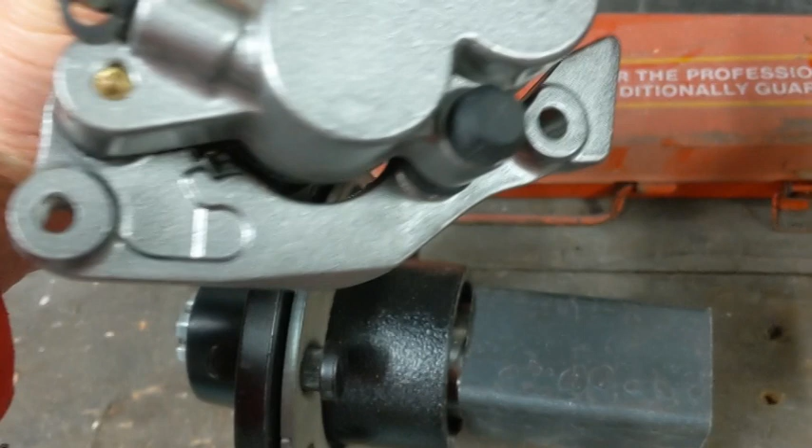So the space is actually going to be determined by, in actual fact, the bracket, the mounting bracket for the brake caliper. I can space the disc for the caliper over there. So it's those two mounting holes, one there and one there, attached to a metal plate, which then is welded onto that stub axle. So my new spacer will be there, rather than based on just the front end of it clearing the wheel.

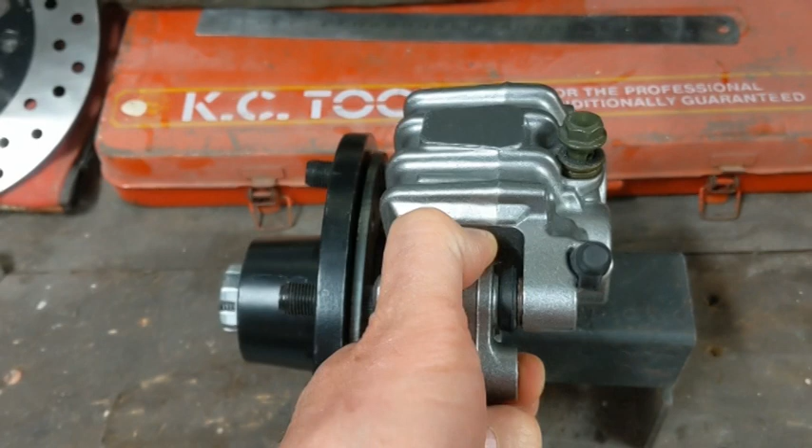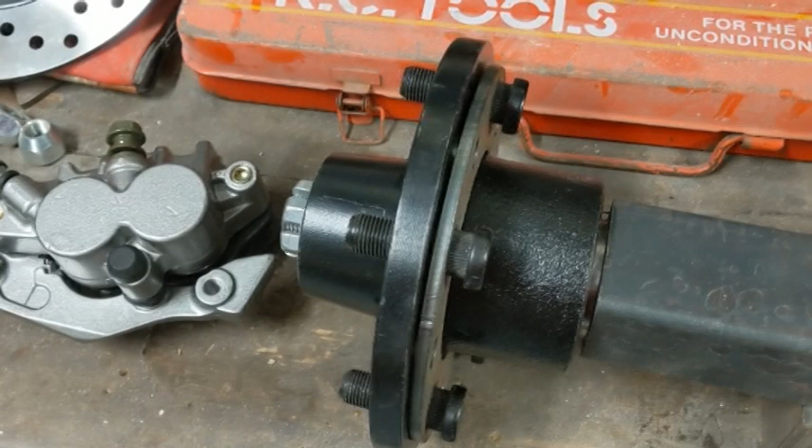So looking at the big picture is what we needed to do here. I'll make some adjustments now. So the next thing I'm going to need to do is to design a bracket that mounts, takes two 8mm bolts here, that then welds onto this plate, and it needs to be appropriately positioned so that the disc and everything sits nicely.

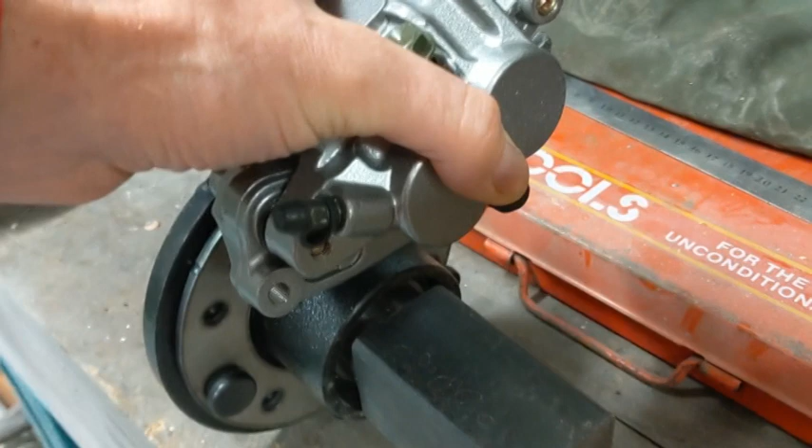So it'll sit somewhere, obviously, like, I don't know, doesn't really matter what angle I put it on, I don't suppose. I might just put it at the top, I guess, when I make the mounting bracket. So we'll go and design a mounting bracket.

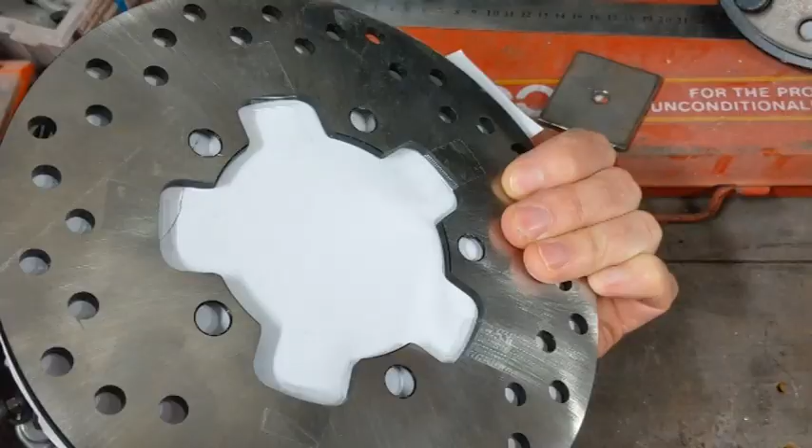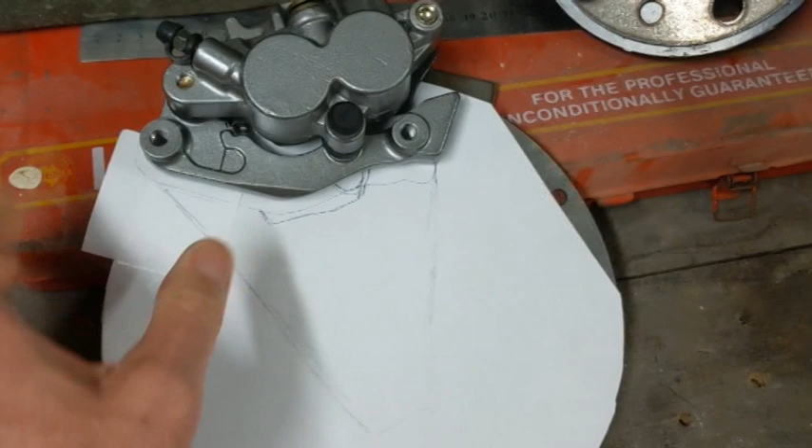Okay, so here we are doing some really high-tech design work. A bit of paper stuck on the front of the disc. And what I've done, as you can see, is I've drawn a quick sketch. So I've placed the caliper over the top of the disc here, and drawn just quickly inside the holes there to indicate where the 8mm bolt goes, and then just a quick sketch sort of coming down, and I'll probably come up and around down here and up here.

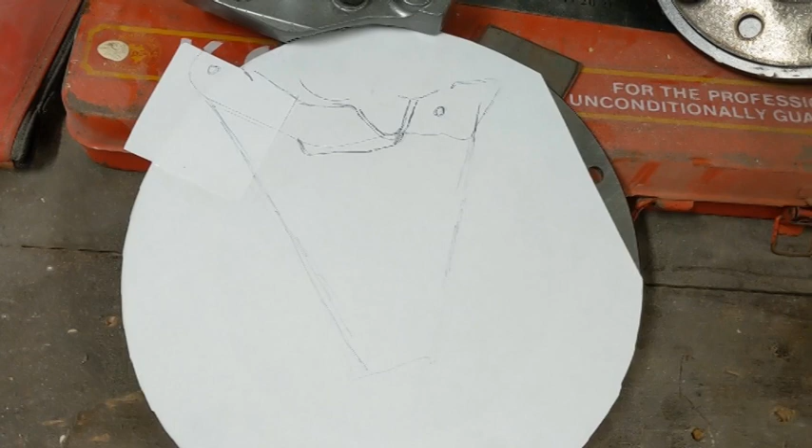So I'll draw that up in CAD to scale. Essentially, I'll take a photograph of this and then pull the photograph into CAD, scale this disc to 22 centimeters. Thanks for picking me up on that one, Ken. And then get it all scaled up, draw this piece up in CAD, as I said, print it out on paper, and then cut it out and see if it looks like it's going to fit. So the next thing is to take a photograph and get some drawings done.

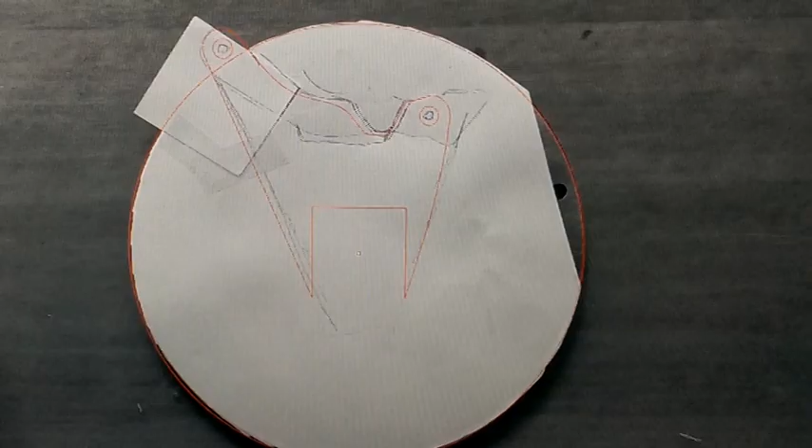So this is the drawing that I've done. I've dragged my photograph in, scaled it to 22 centimeters across, marked the center point, drawn in the stub axle, so I measured that up, 45.5 millimeters across. I've drawn that in. And I made these 9mm circles here. The bolts are 8mm, just to give it a little bit of slack.

And then I've drawn in where I think my metal edge should be. So this is the part here. It's now highlighted that I'll be cutting out on the plasma cutter, and if it obviously doesn't work, I'll just move things a little bit, but it should work to hold the caliper on the stub axle if all goes to plan. So that's the photograph with my feet there.

Oh, there you go, another project I'm doing for my brother. He wants a Harley Davidson sign, so I'm going to laser cut that for him, plasma cut that for him. Anyway, what's happening?

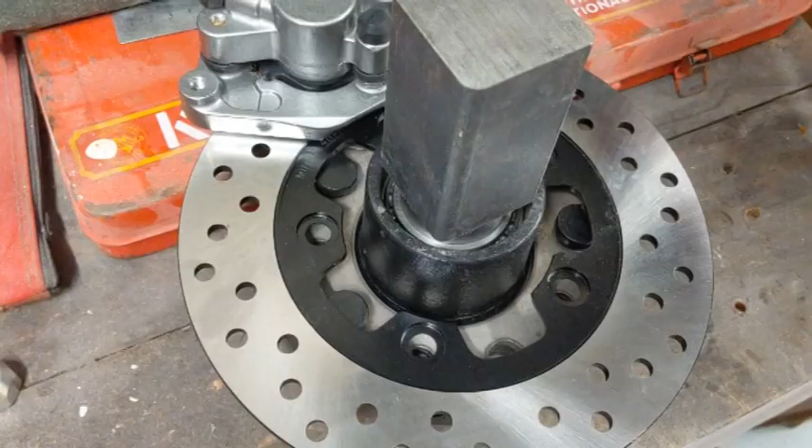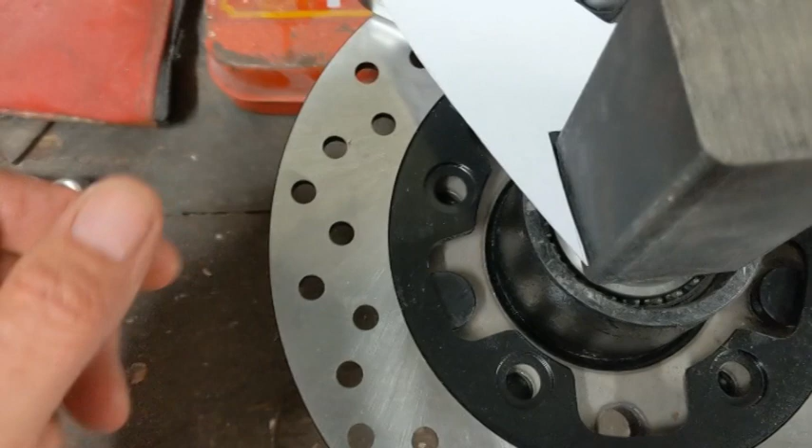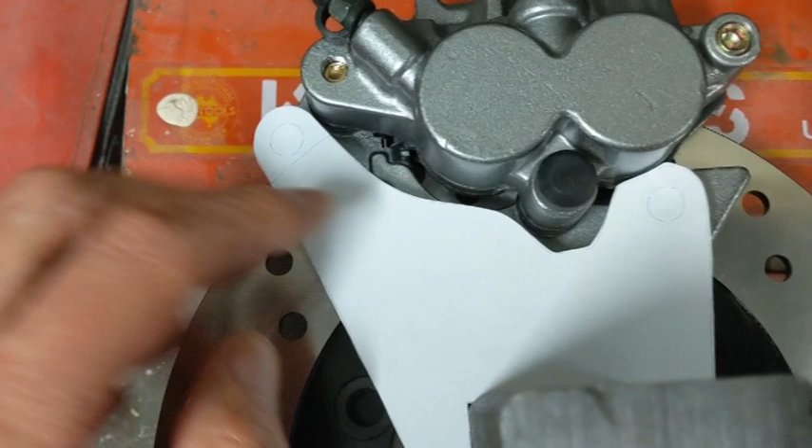So here's the part that I printed out and cut out, just made out of paper. I'll just slide it over the axle there. We just sit it there. It looks pretty much like it's lining up with the holes. It's not crashing into any parts there, so it looks like it should work. So from here I'll basically just cut one of those out on the plasma cutter and we'll see how it goes.

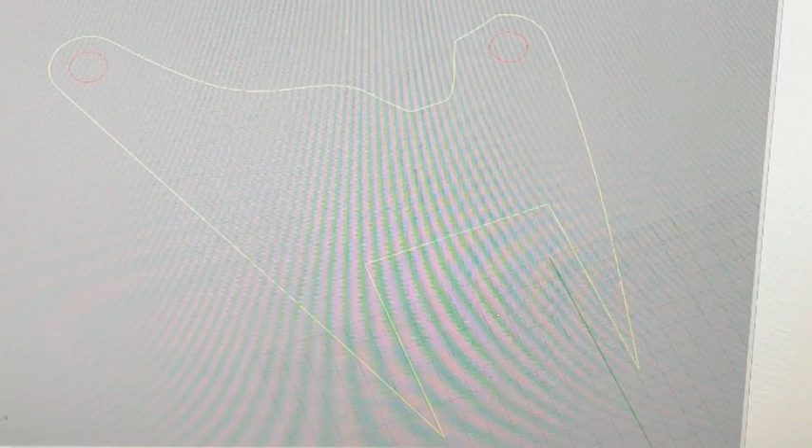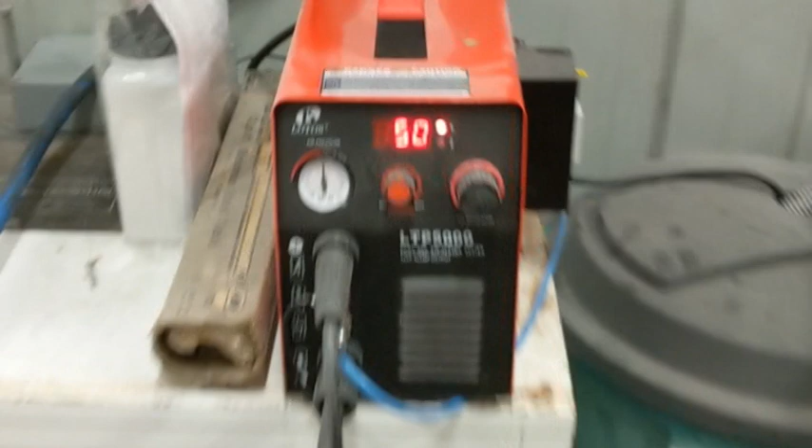So here's the part ready for cutting. So I'll just simulate the tool path for the cut. Cuts the two circles inside and then the outside of the actual bracket. Alrighty, here we go. We've added a bit of dye to the water there, so it looks a nice blue colour now, so it's ready to go. If we look at the cutter here, that's the part we're going to cut.

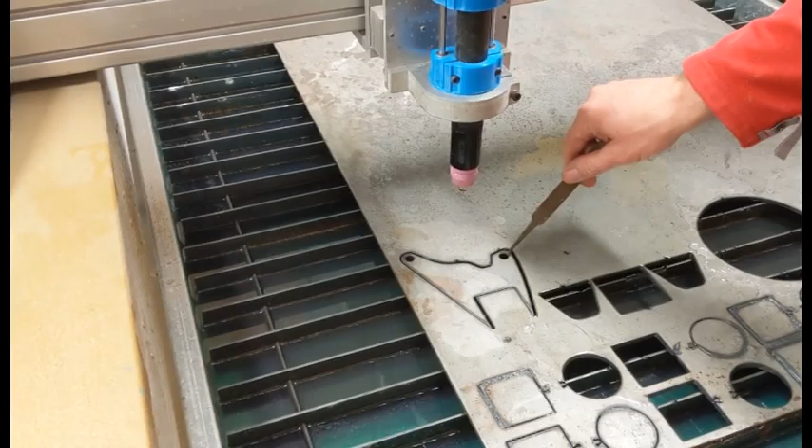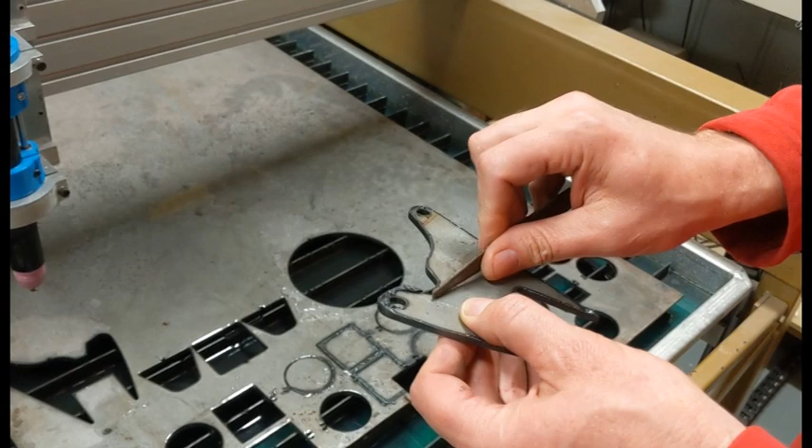So here's the part, all cut. Again, a little bit of dross on the back, but all that stuff pretty much just flicks off. It's not hard to get off. So cleaning up these things is pretty easy. Alrighty, so next we'll see if that fits, and that's the brake caliper holder.

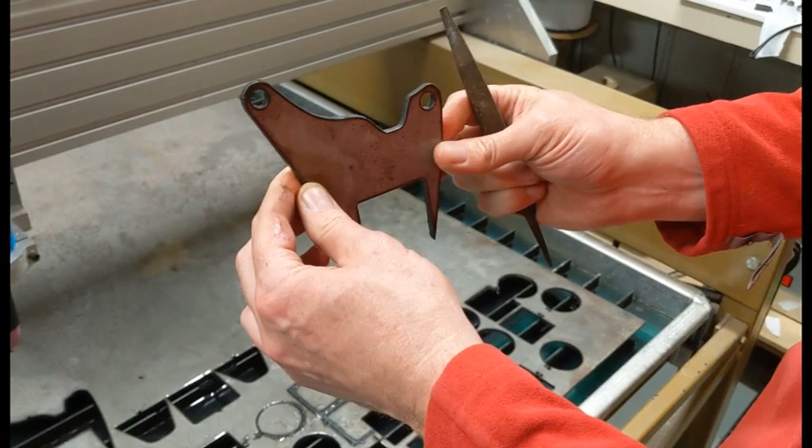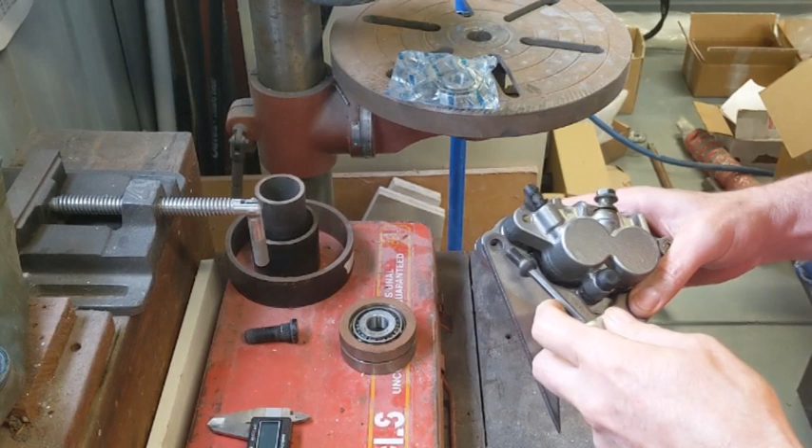So here's the part cut out, all cleaned up. It seems to fit onto our brake caliper quite nicely. So we know we've got the shape right.

But I've been having thoughts about how I'm going to get the steering to work, so I may just adjust the design a little, doing a different steering bearing mechanism, so that fits in there fine. So that's fine for the basic design of it. So what I'm going to do is, here's my axle, that fits over there, but I think I'm going to change the way I do this.

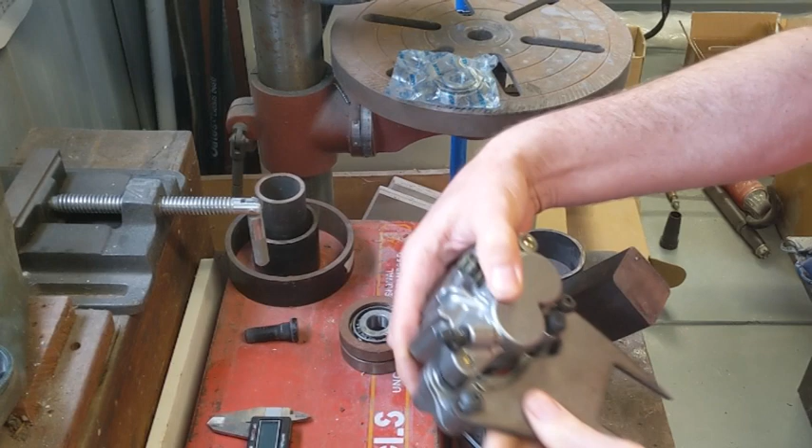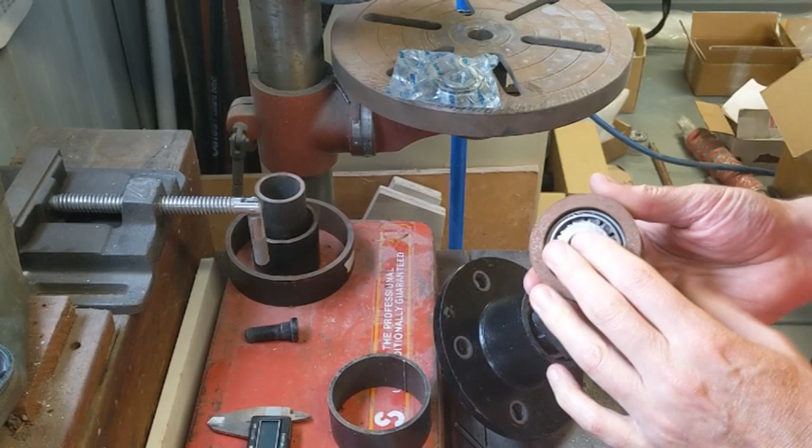I want to, this is the support arm material, some left over from the first bike. I'm going to put bearings in. I'm going to use the tapered bearings. So I'm going to turn up in the lathe essentially a block of metal, tapered bearings on both sides, and I'll plasma cut a hole in a pipe so that the top of the bearing sits flush with the top of the pipe.

And then I'll chop this off at the end here, and I'm going to use some 8mm, 50mm across metal bar essentially to make a U-shaped bracket, and then I'll put a bolt through and that'll be my steering arm. So I've got these 7mm bearings that should provide enough strength to hold the bike top and bottom to make the bracket, and then from there this will be mounted onto the end again, so I'll just have to make this hole a little bit bigger and also compensate for the extra bit of metal up top here. But I've got the basic shape, which is good.

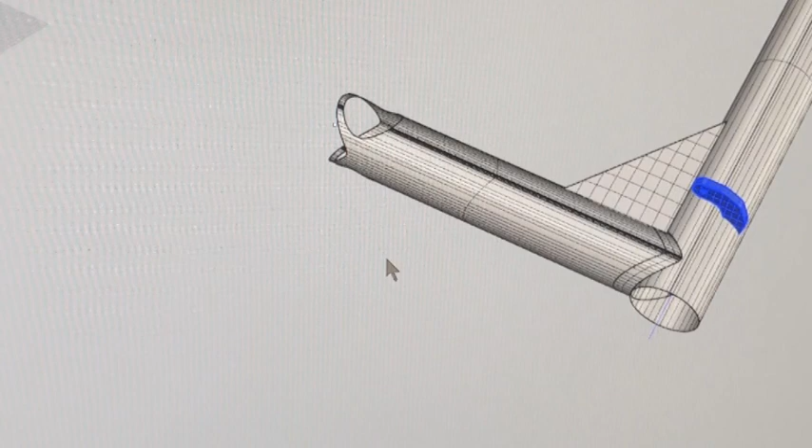And I'll put a steering arm coming out of the top bit as well, so the steering arm will come up on this angle here. So I'll show you a CAD drawing shortly. Here's the front end of the bike. You can see the section of pipe I'm going to cut away there. So that will contain the front bearings.

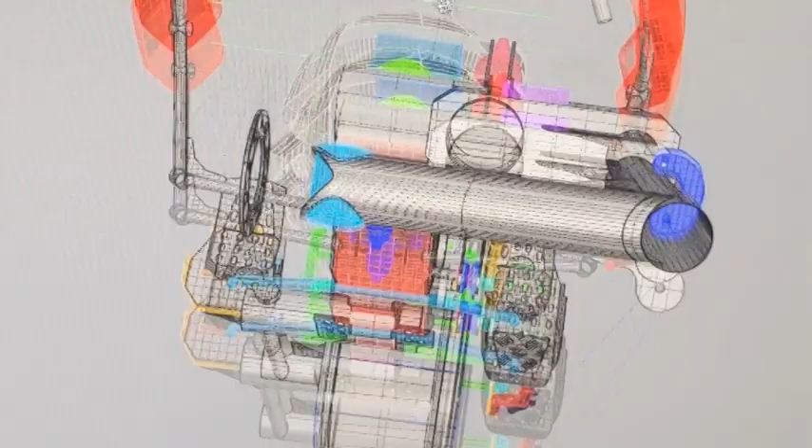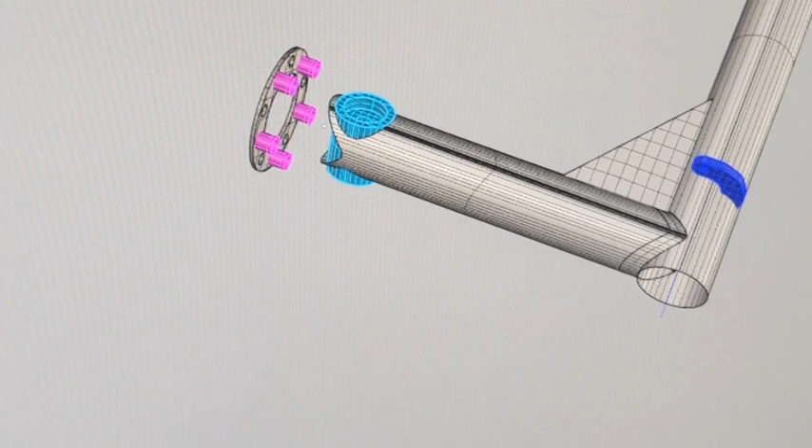So if we pop that into the drawing, that'll sit there with your bearing. There's your adapter plate. So I'll have my tapered bearings in there. And there. The spacer plate is there, which we've already cut. These are the spacers that I'll need to ensure that my disc caliper's located in the right spot. And the front rotor, which will get bolted on to those spacers, and the front axle. So it'll look something like this.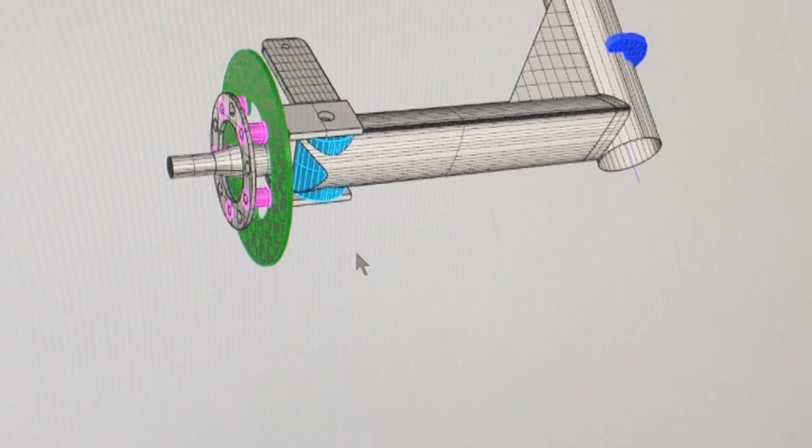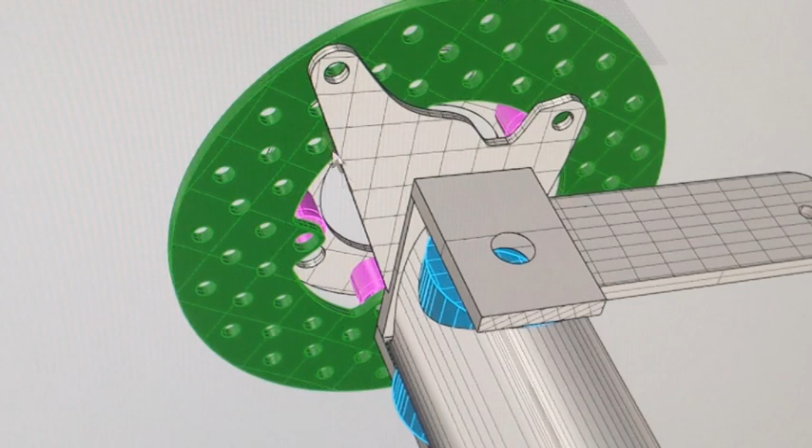I'll chop off the stub axle. We'll weld it onto the plate there. This is your steering arm, which goes back to this part of the bike here, which is where your steering comes from when it comes down the column here. The brake bracket, which we've already designed, I'll just need to make that a bit bigger to fit over this 50mm. So I'll probably just cut another one. I guess that's the beauty of a plasma cutter, we can just cut things again if we make mistakes.

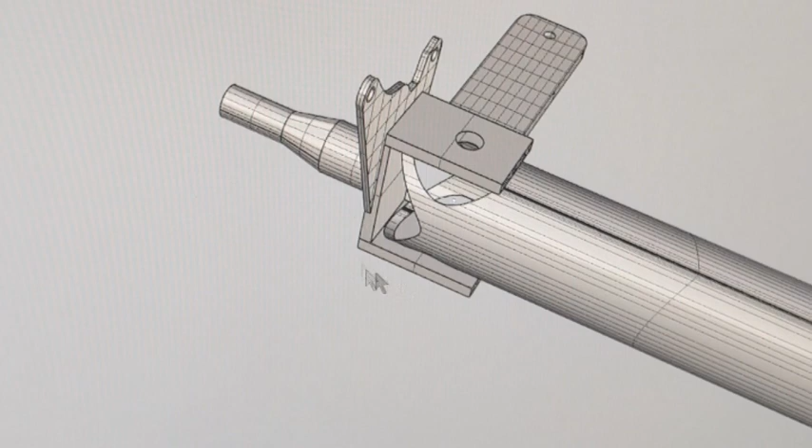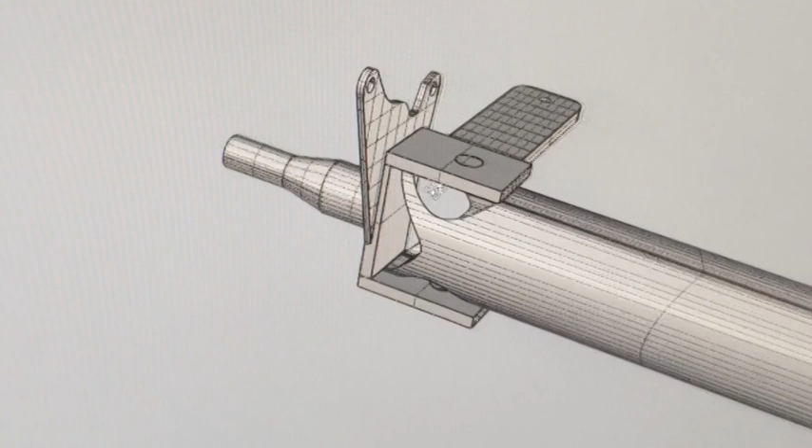So this piece here will be welded as one solid piece. I'll just bring it up. So this will be one solid piece. The brake arm, this U-shape, the axle will be welded on, and I'll weld the brake caliper on as well. On the previous bike I also had another arm coming out here, which was where I connected the steering damper, but I'm not sure how effective that was at the end of the day, so we'll leave that for another time.

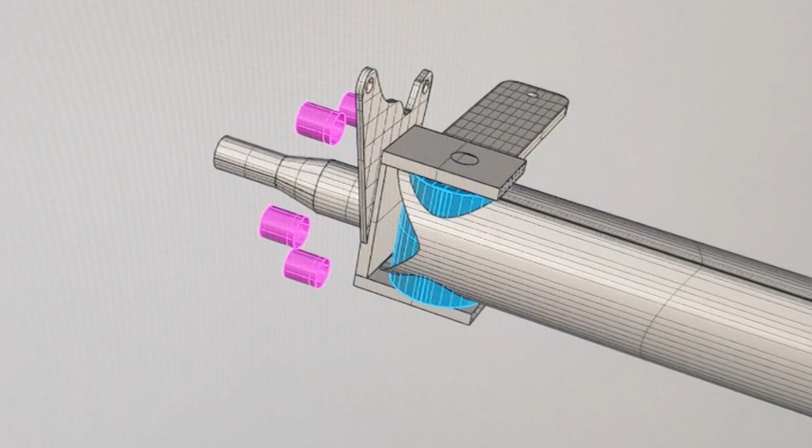So the next part we'll get made is I'll chop off the axle, cut up these bits of metal here. I'll probably cut a hole through the end plate here, and then we'll weld the axle on both sides, have all this welded together, and I'll also turn up on the lathe the center bracket that holds the bearings there. So that's the bit we'll get working on next.